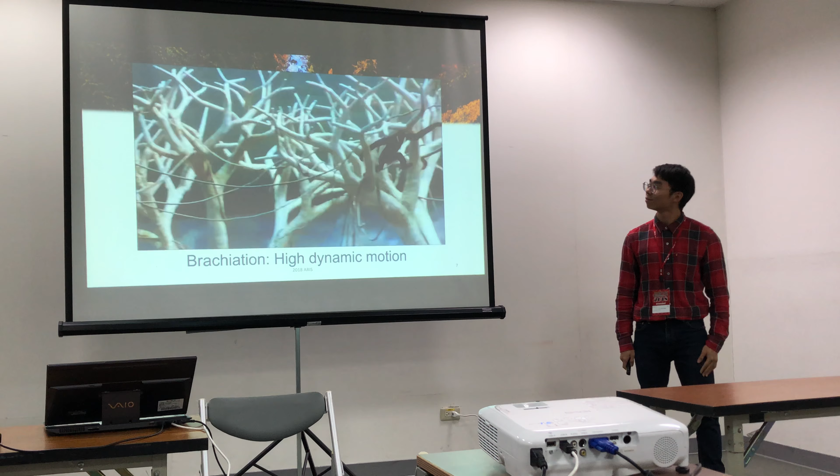Wow, as you can see, this amazing creature gives a perfect demonstration of brachiation. So we did some research on a related topic. Many researchers, such as Professor Toshio Fukuda, have already explored this field since 1991.

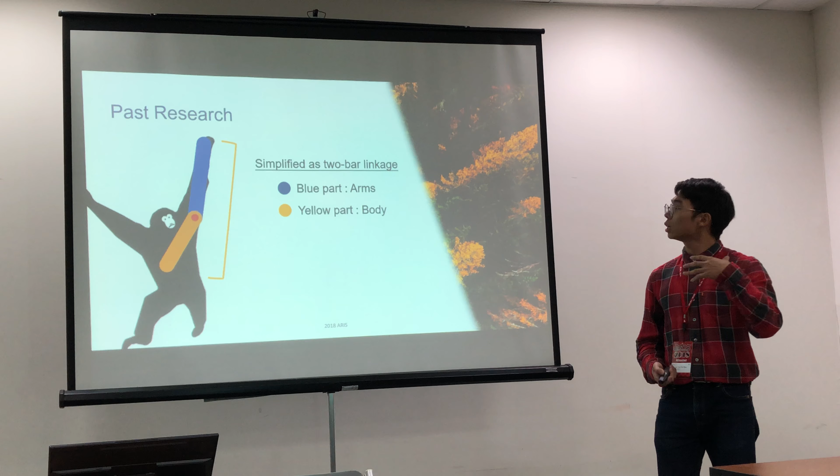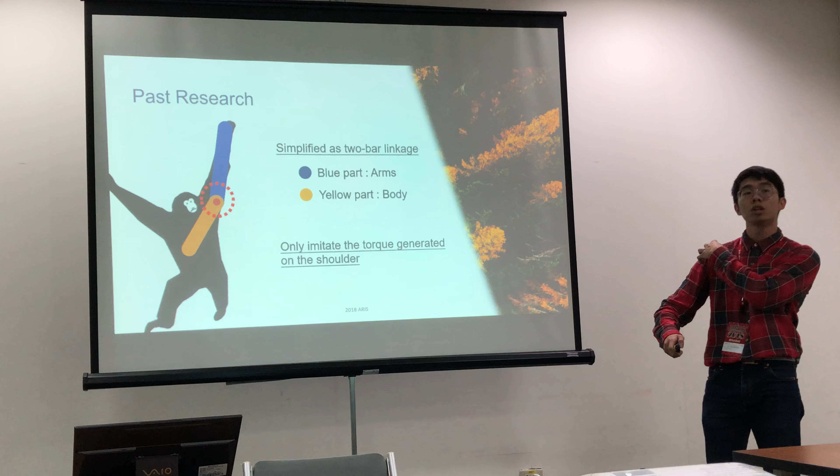From these papers, we have found 2 characteristics. First, they all define the whole Gibbon as a 2-bar linkage. The blue part is the arms, while the yellow part is the body. The second characteristic is that they only imitate the torque generated on the shoulder, meaning the brachiation uses the energy accumulated on the shoulder, and the whole arm is regarded as a rigid body.

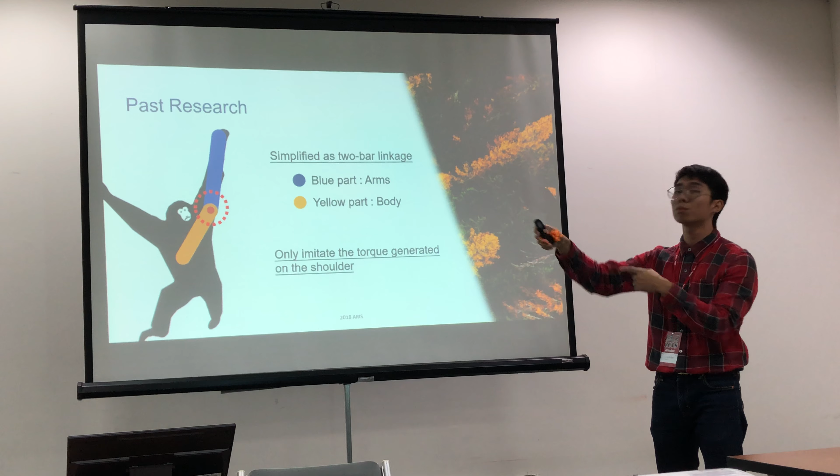However, we started to wonder, is it possible that Gibbons could do the brachiation only by the shoulder? In the previous video, we have seen that the Gibbons swing between branches with different heights. So we think that arm muscle might be involved for grabbing the branch, because there is a pulling motion to grab.

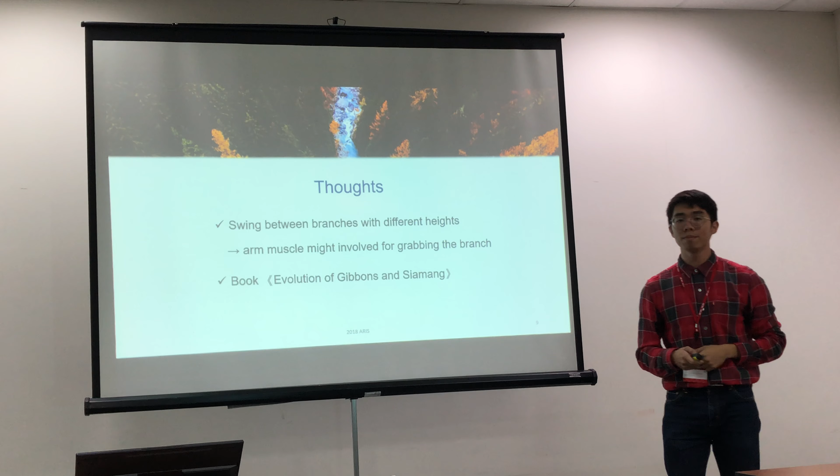Furthermore, in the book Evolution of Gibbons and Siamang, the author has mentioned that Gibbons have strong flexors. What is a flexor? It's the muscle of the arm, and the strength it could provide is 3 times as much as the Gibbon's weight. So it's highly possible that the arm muscle is involved, and this pulling motion needs to be considered.

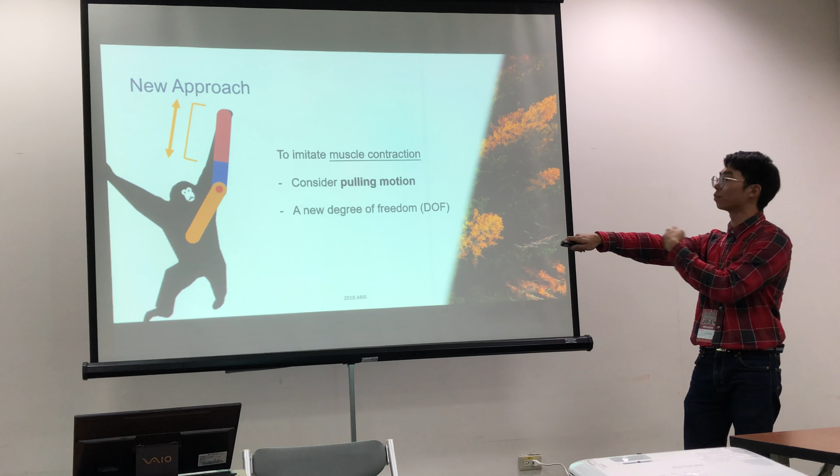So, to imitate the muscle contraction, we take the pulling motion into consideration. This means we need to add a new degree of freedom on the arm, which is a prismatic joint. In practice, we use a sliding mechanism to realize this concept. So our goal in this paper is to investigate whether this additional degree of freedom enhances the efficiency of the brachiation or not.

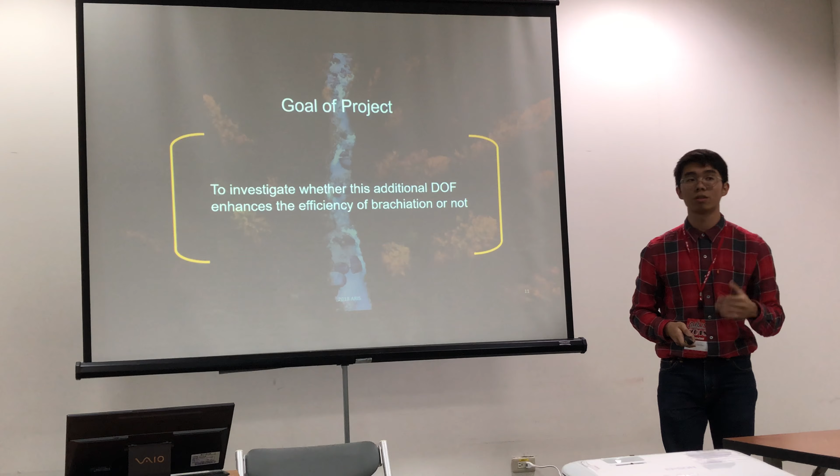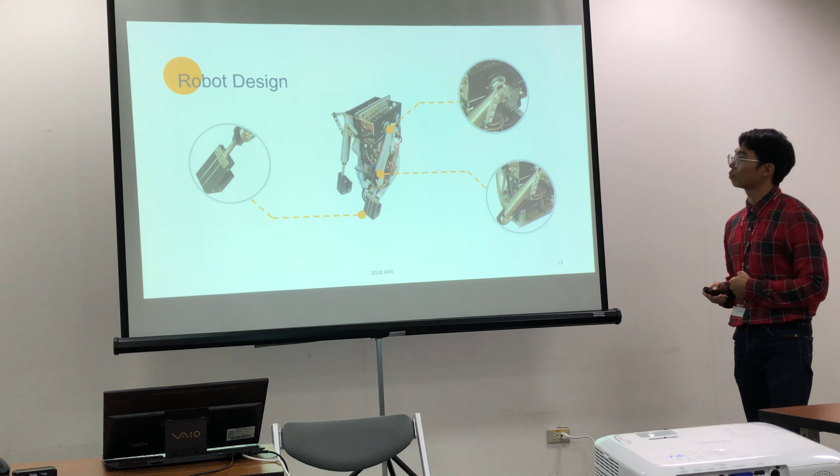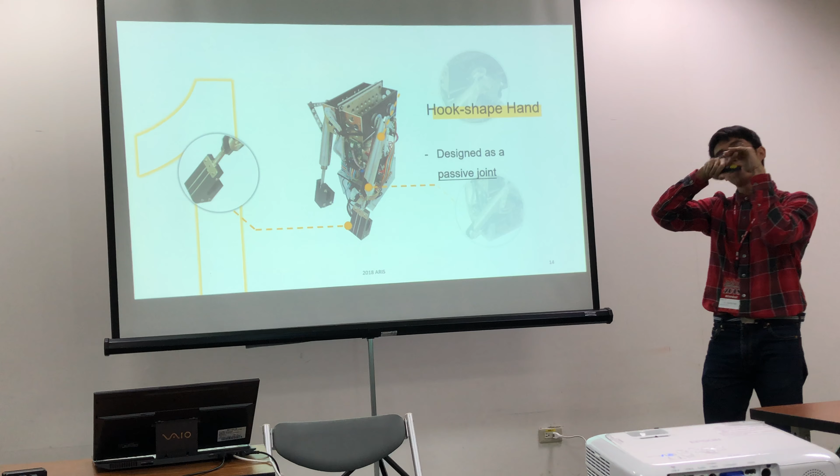Let's talk about how we build this robot. This is our brachiation robot. It has 3 essential mechanisms. First, this robot has 2 hook-shaped hands. The position where the hand touches the branch is designed to be a passive joint, so the surface of the hand needs to be as smooth as possible to reduce friction.

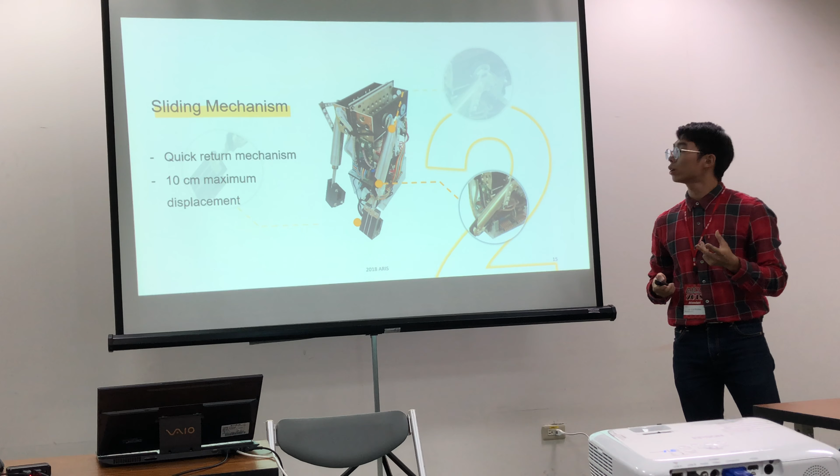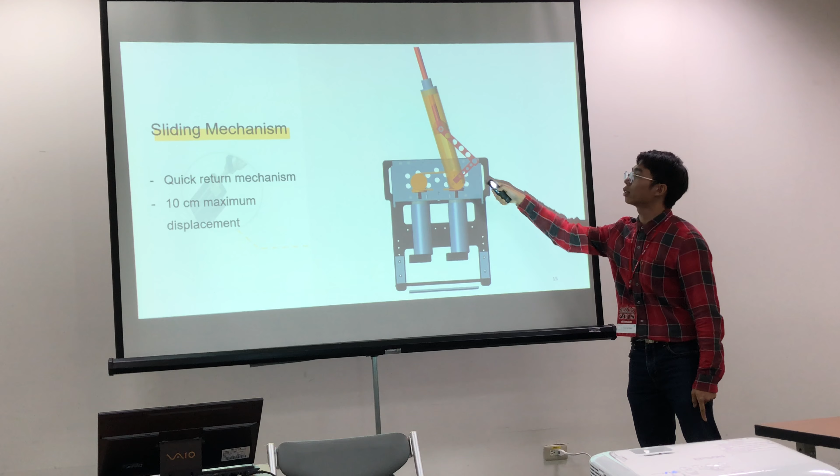The second part is the sliding mechanism, which I mentioned previously. We chose the quick return mechanism to realize it, and its displacement is 10 centimeters. Here's a side view of our robot. As you can see, the brown part is the sliding mechanism, and the ochre part performs the rotation of the arm.

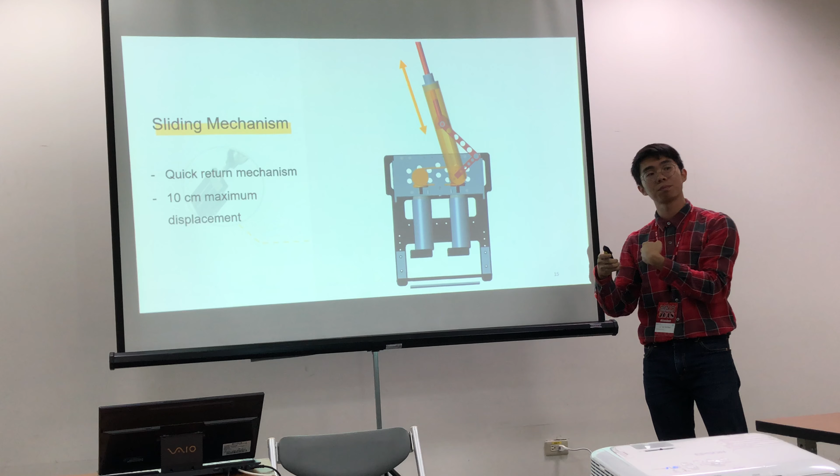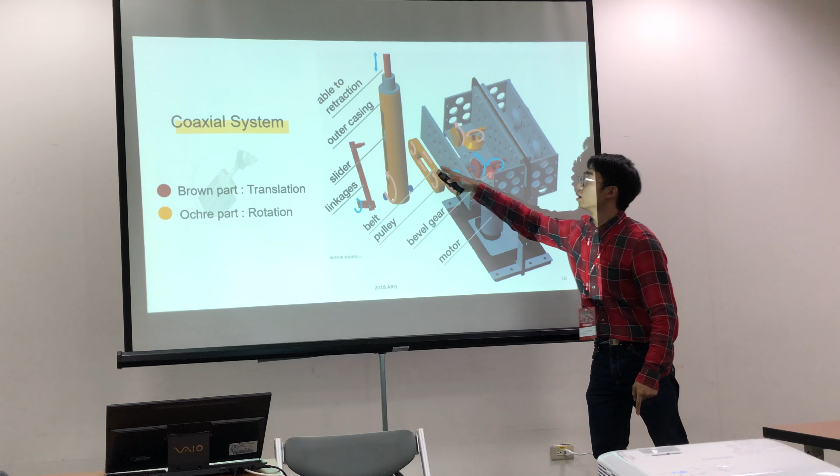So there's a question: how do we combine these 2 functions on a single arm? Well, we designed a coaxial system. Let me use an explosion map to explain. As you can see, the translation part is triggered by this motor, while the rotation part is powered with an additional belt. This belt transfers the power to the same axis as the translation, so we could then combine these two functions.

So with these three essential mechanisms, we could therefore go through the experiment. However, before the experiment, we need some simulation to give us primary instruction. So let's talk about our simplified model.

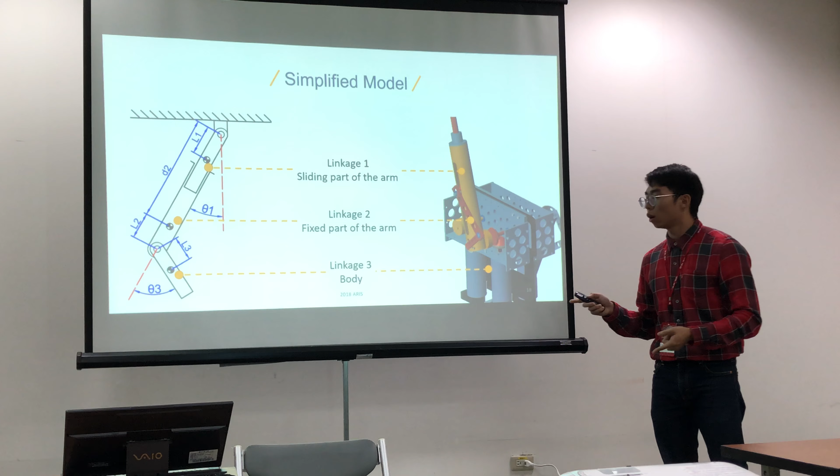We divide the Gibbon into two parts, the arm and the body. The arm has two linkages, a sliding part and a fixed part, and the last part is the body. One might ask, where are the feet?

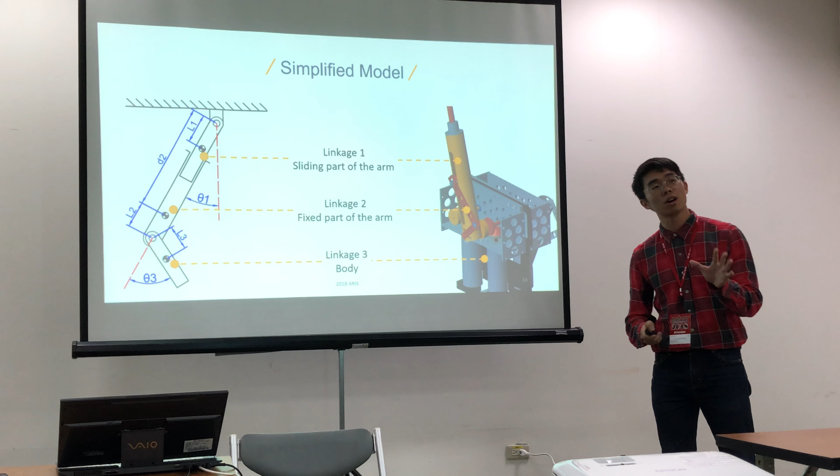Here I want to note that we regard the lower half of the Gibbon as a rigid part. It's because while doing the brachiation, the Gibbons actually crunch their body together, so it's unnecessary to separate them.

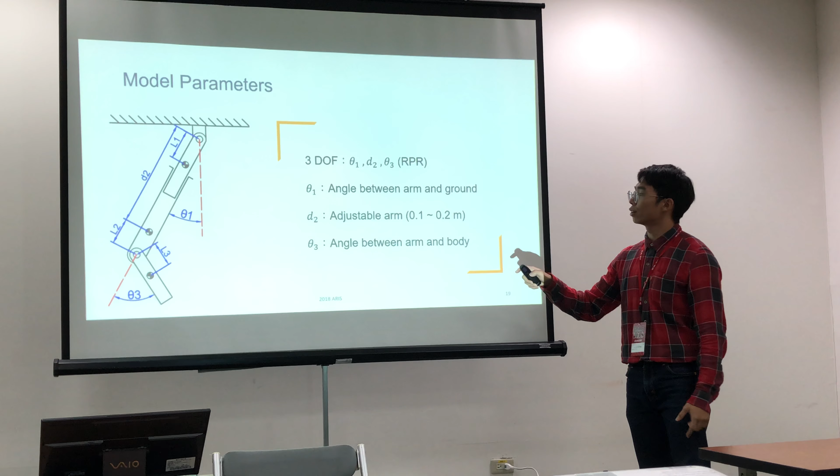There are 3 degrees of freedom in our model: 2 revolute joints and 1 prismatic joint. D2 is the stretching length of the robot, and theta 3 is the angle between the arm and body.

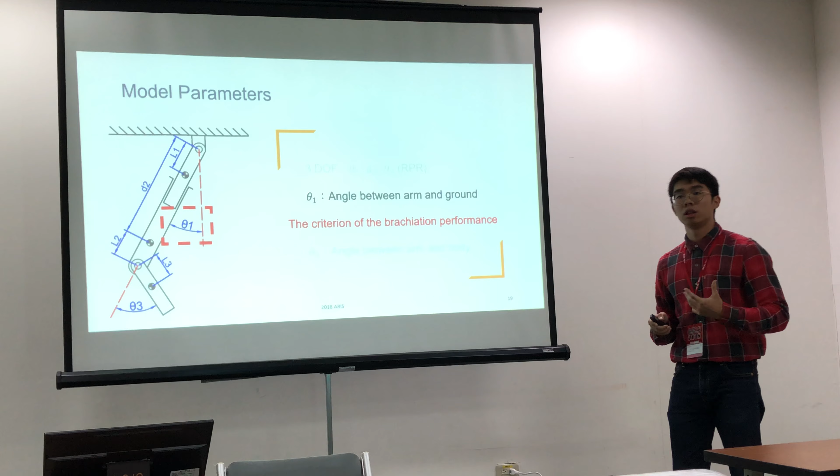But the most important parameter is theta 1, as you can see. It's the criterion of the brachiation performance. The larger theta 1 is, the higher the robot swings.

So to build these degrees of freedom with the input torque, we choose the Lagrange equation as our governing equation. The Lagrange equation is the energy method based on ordinary differential equations, and there are 4 parameters affecting the whole equation. K and U indicate the kinetic and potential energy of the system.

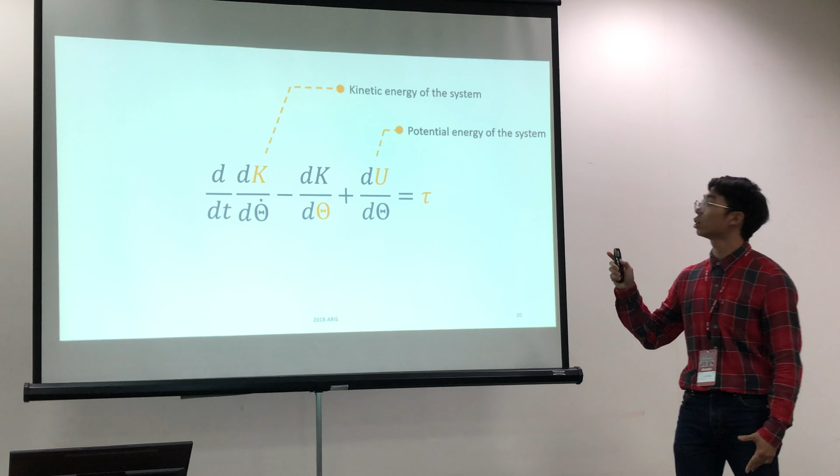In the lower half of our equation, capital theta refers to the state, which includes the 3 degrees of freedom and their differential terms. Last but not least, the input tau refers to the input torque on the shoulder and the input force for the arm.

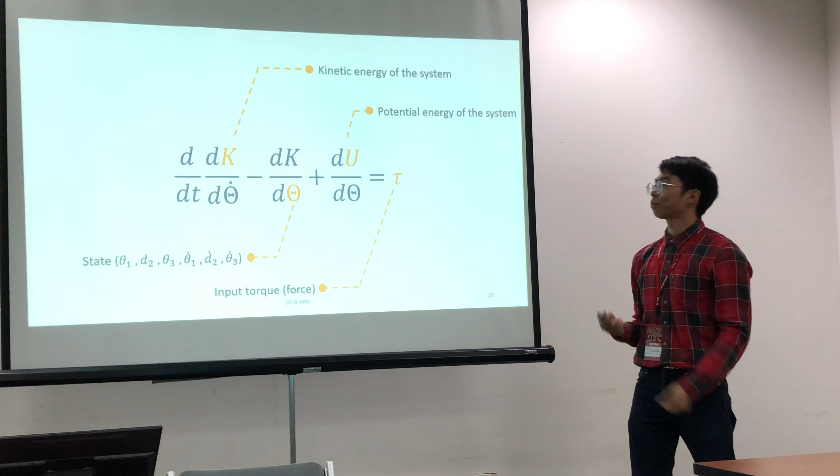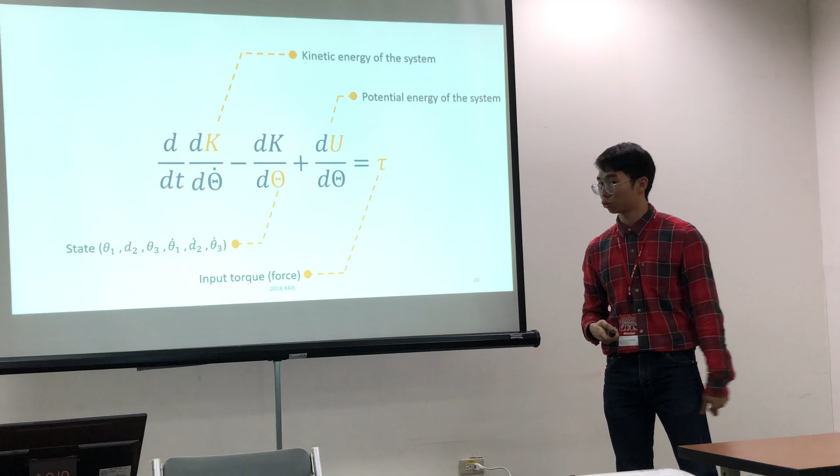So we need control strategies to give the instruction. This is the only parameter we could modify to implement our control strategies. So we need a control strategy to enhance our performance: one for the torque generation on the shoulder, and one for the arm force generation on the arm.

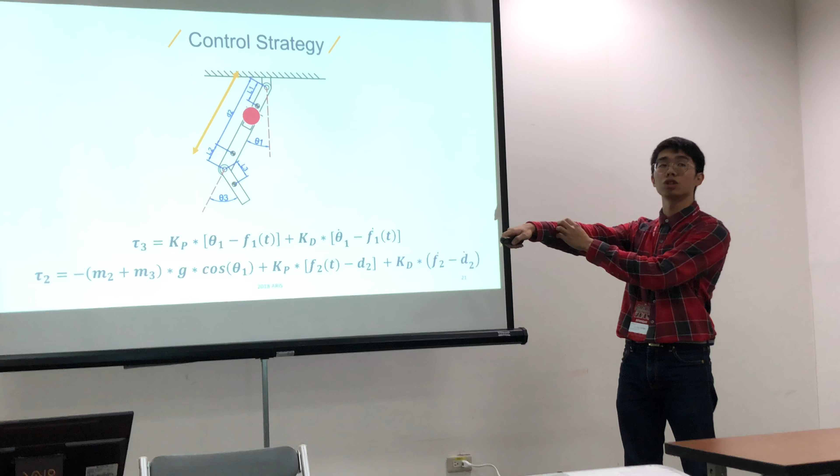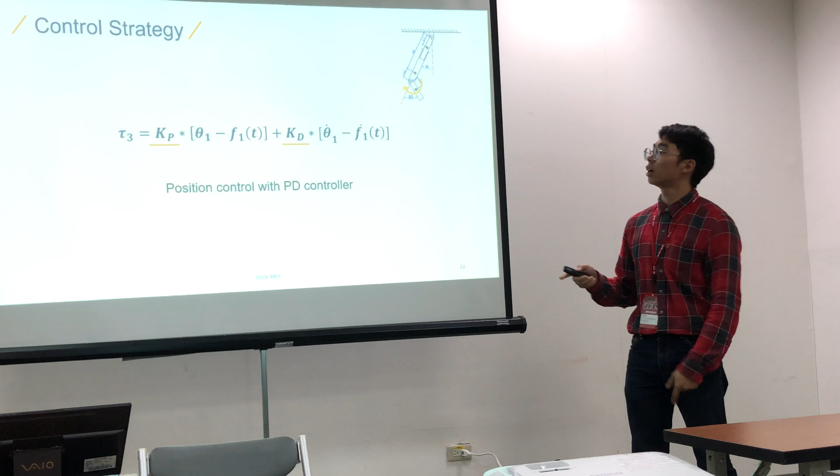So let's start with tau 3. Tau 3 imitates the shoulder's torque, and we use a PD controller to track theta 1. As for its target function, the trajectory of theta 1 is supposed to be like a periodic function.

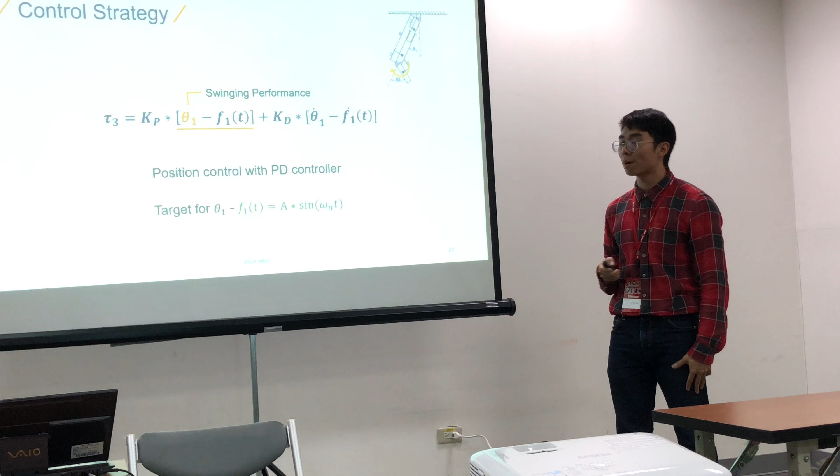Theta 1 should be swinging. So we choose a sinusoidal wave with the natural frequency of the robot as a target function. Here we know that the more error occurs, the more torque we need.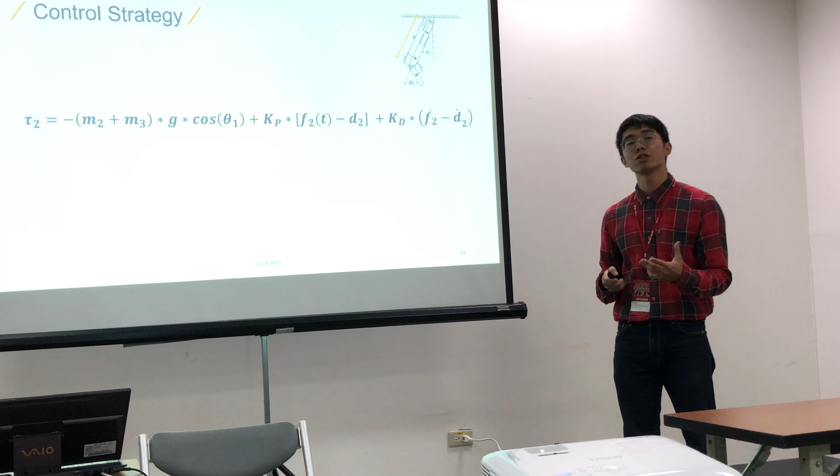As for tau 2, the control strategy is similar but slightly different. Due to the robot's weight, we take gravity into consideration, so we add a gravity compensation term here. In the latter, the PD controller is still applied to track D2, which is the stretching.

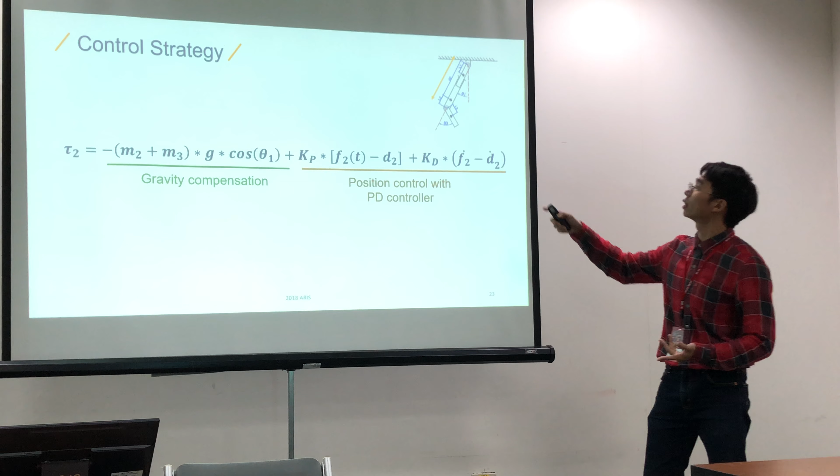As for the target function here, we use 2 cases to compare: set point and sinusoidal wave. The difference is whether this pulling motion is involved. If we use the sinusoidal wave, it means it has a periodic function.

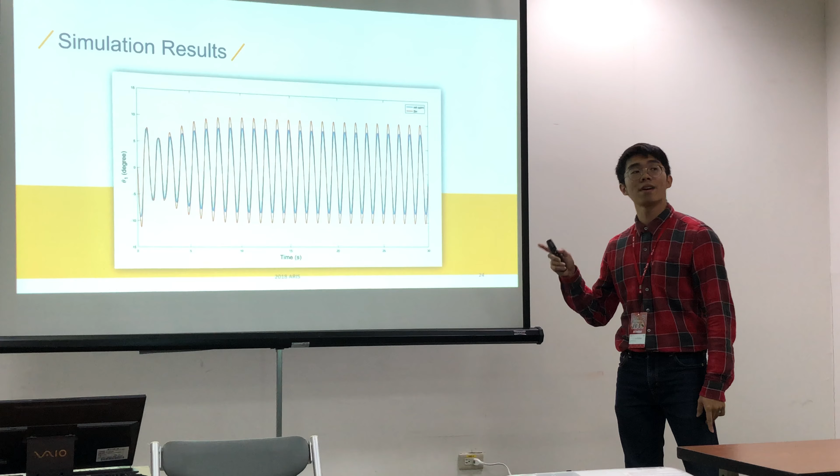So let's take a look at the results. This is a plot of the performance of theta 1. As you can see, the blue line is using the set point, and the red line is using the sinusoidal wave.

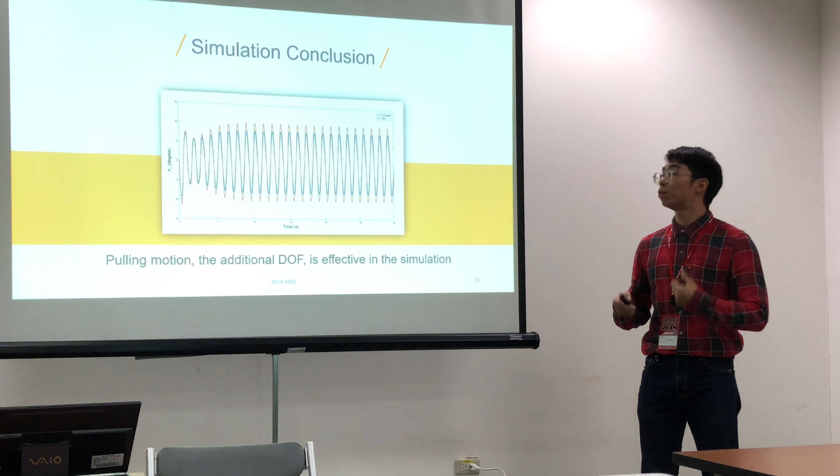As you can see, theta 1 rises from 8 degrees to 10 degrees. So we can give a conclusion that the pulling motion, this additional degree of freedom, is effective in the simulation. So then we could move on to the experiment.

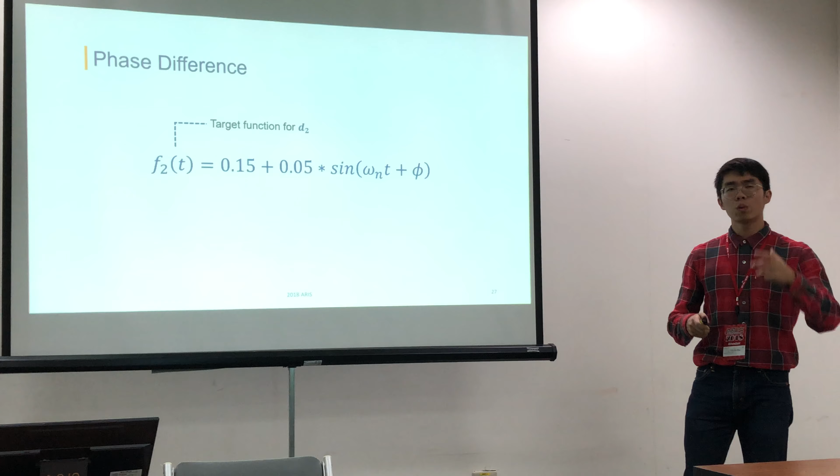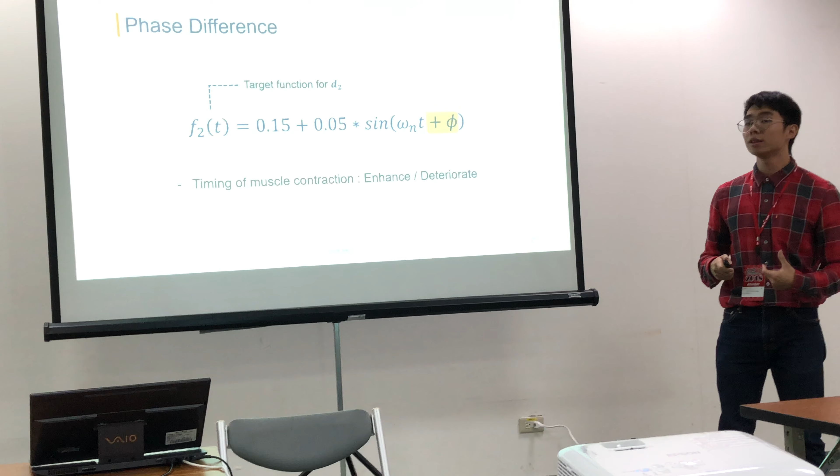When we apply this target function into the robot, we found that if we add another term, we could enhance the performance, which is the phase difference. Why? From the biology point of view, the phase difference represents the timing of muscle contraction. This means that if you use the right phase difference, it will enhance the performance, while a bad one will deteriorate it. So we don't yet know what value we should choose.

So we will conduct experiments and return to the simulation for modification. Here's a demo of our experiment. First, we show a pure brachiation of our robot.

And then we will apply sliding mechanism movements with two phase differences, right and wrong. As you can see, the motion of case 1 is enhanced.

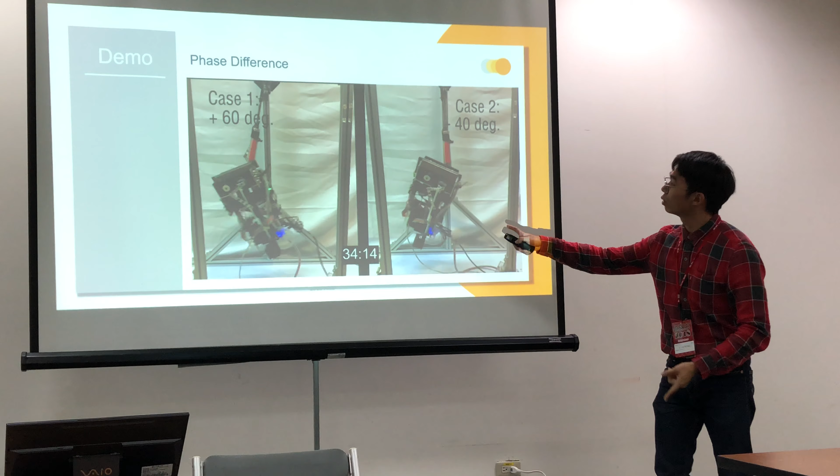The whole body swings regularly while theta 1 is larger than before. On the contrary, in case 2, the whole body swinging pattern is destroyed and theta 1 is smaller than before.

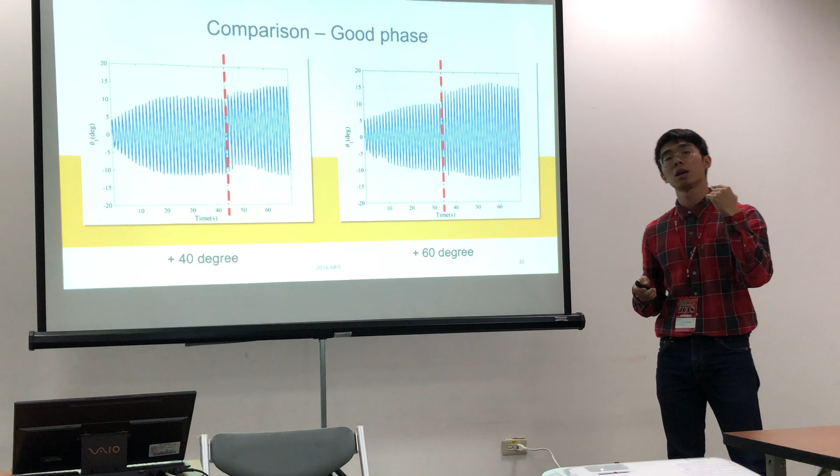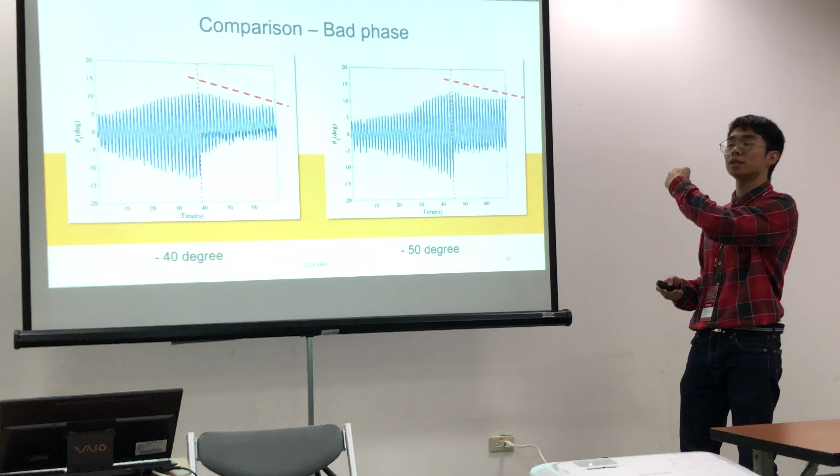On the other hand, when we use the wrong phase difference, not only does the peak value of theta 1 decrease, but also the swinging pattern is destroyed. It means that the robot couldn't reserve energy for the next move.

So we collect this experimental result and return to MATLAB to derive the best difference we could use, and we generate new trajectories for both motors with new control strategies. So let's see the result after this modification.

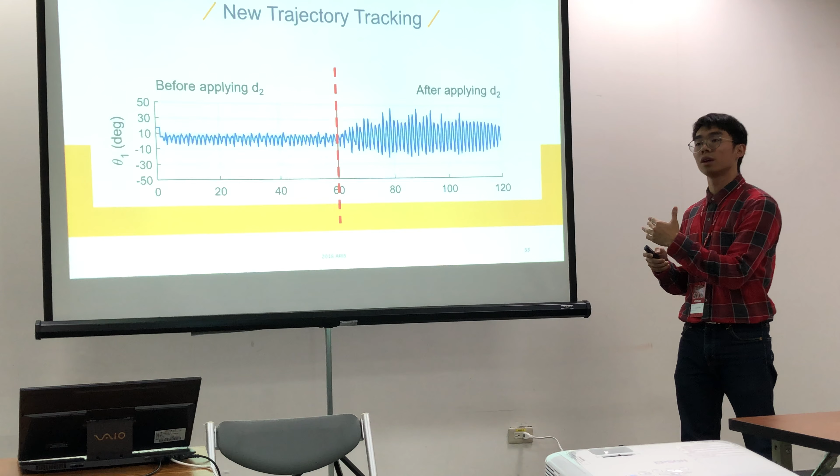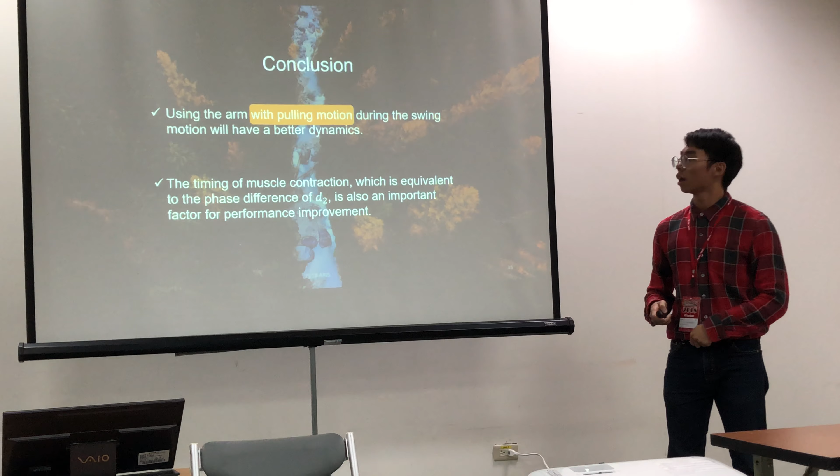So looking back to the goal of our project, whether this additional degree of freedom enhances efficiency or not, I think both simulation and experiment give us an affirmative answer. The pulling motion results in better dynamics. Furthermore, we found that the timing of muscle contraction is also an important factor for performance improvement.